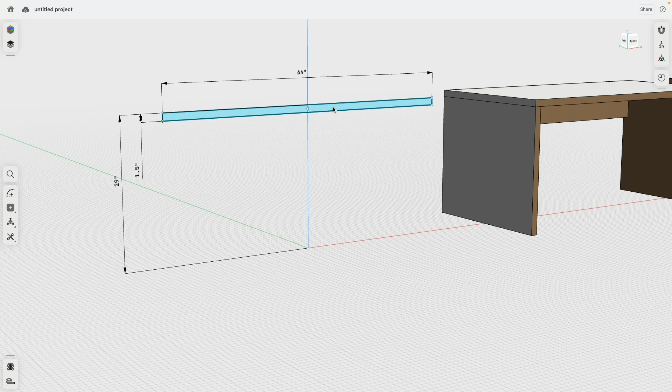Hello everybody and welcome to this furniture design tutorial, in which I'm going to show you how easy it is in Shapr3D to take a pretty boring rectangular sketch and create an interesting exploration of how an office table could look like. We cover different topics: alignment, putting sheets together, creating interesting looking metal legs, and then we'll go into more complicated tubular legs. We finish with a more refined mid-century like wooden table. At the end, we're going to put everything into the Visualization to add materials and explore how this whole series could look like. I'd say that's pretty fun.

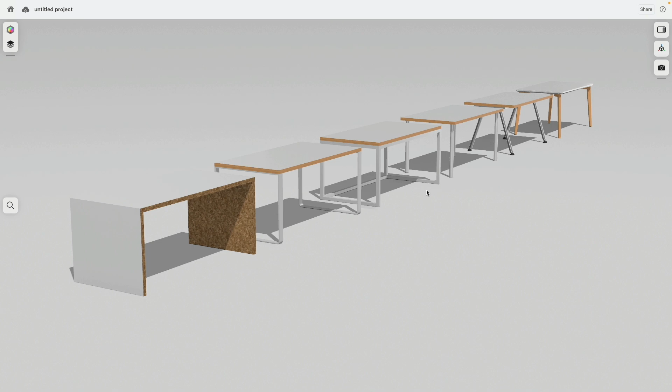Okay, let's do it. Before we get started, let's make sure snapping is on. We are in inches. Let's go to the front view. I move this one down, go to sketch, and I will start with the rectangle center on the z-axis, that's where I will start. I will click and then drag a rectangle out: 1.5 inches for the board thickness, tab, 64 inches for the board width, and enter.

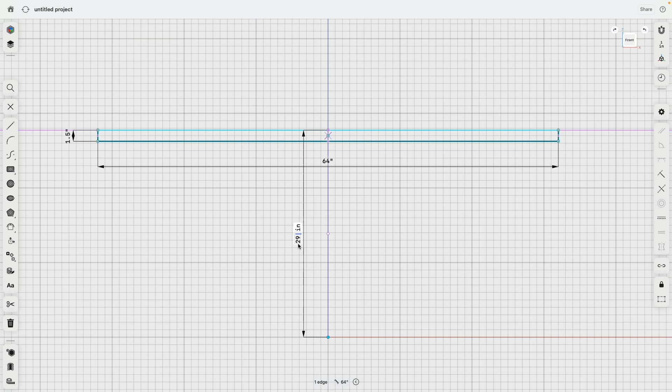Press escape. We can select the top edge, that's basically where the surface of our work surface would be, and select the sketch origin point. This dimension here we would like to be, let's say around 29 inches, 28 inches, based on if this is for an adult or for a kid, teenager or something. Press enter. Now we do have the position of the height and our tabletop.

So we can now select one sketch, drag this one out, and this will be - so 32 should be the combined - so let's say 16 inches. And then we go to history, extrusion, and say symmetric. So now this should be 32, and it is perfect. So there we have our generic tabletop.

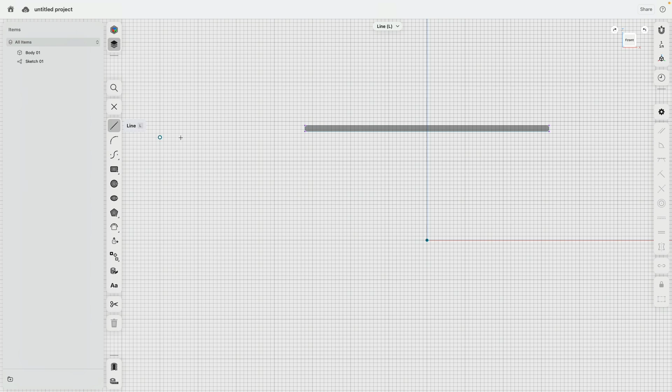Let's take a look at one of the easiest ways how we can build now under this a nice kind of construction also out of wood materials. Because the first sketch I created, I would like to keep alone. I'm actually now creating a new sketch, and there I can see where this new sketch intersects also with my 3D object.

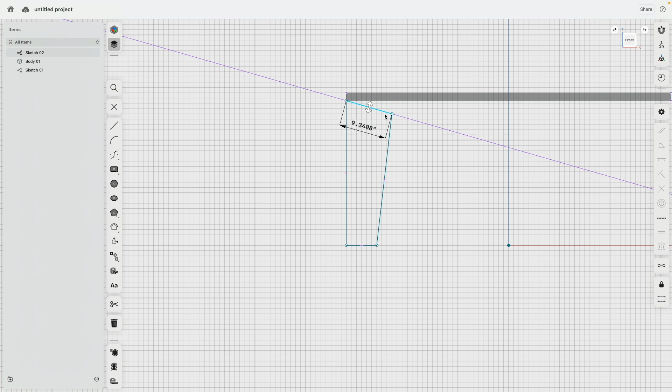Perfect. So there I click, go down. There's the axis. Click, go over, go back up and click. I did this on purpose a little bit crooked just to show you how you don't have to be perfect. This can't go down, this can't, or this can go to the side. So let's make this horizontally constrained. This is locked onto the z-axis. Perfect. So this one is going to be 1.5.

Then we should do the same on the opposite side. There we are. Escape, double click, horizontal, vertical, everything. And I simply make these two lines equal, so this is automatically constrained by this thickness.

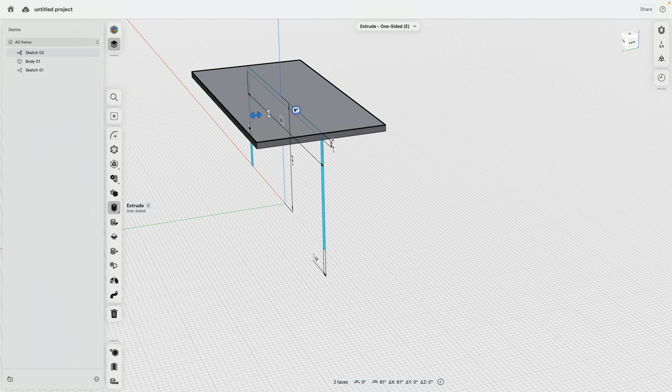Beautiful, cool. Then I can select the sketch profiles, extrude them out to the back of this top board, so I don't even need to specify the dimensions or the distance, and say symmetric. So the problem is that this might easily fall apart if we get a lot of force on the left side, so we need a crossboard.

Okay, so we go back to sketch 2. And now here I will draw in another line on top, escape, and a line here below, and escape, escape, select this one, horizontal, vertical, and then I can say let's say 8 inches. Very good.

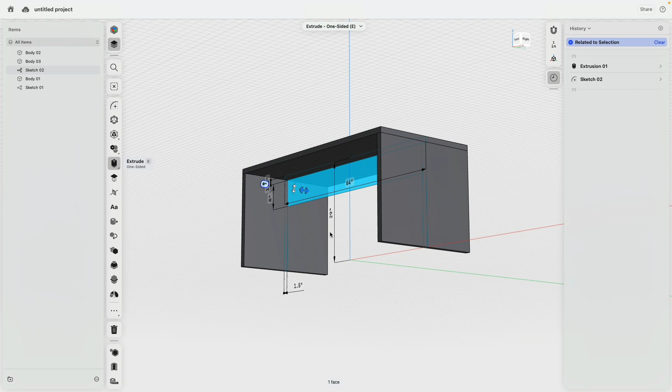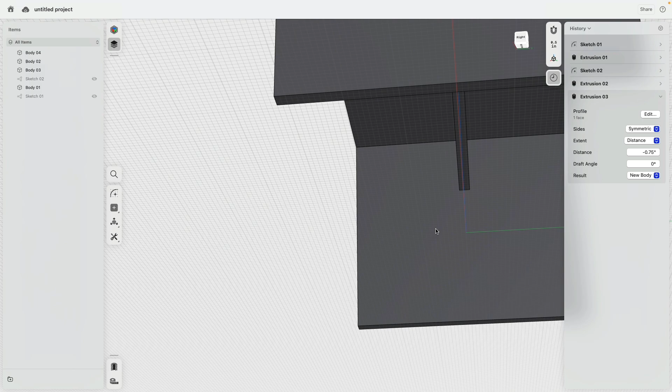So this one, there are actually two methods now how we can do this. We can extrude this 1.5 inches divided by 2, now that's 0.75. Okay, we can hide this sketch and this sketch, and then we go to here and say symmetric. Perfect, so this is now perfectly sitting inside.

And in case I would like this to be more on the back, so when I sit under this table my legs don't punch against it, I could select this one and then simply use the align command and say this one to there. Thank you, perfect, cool, okay. Oh, easy peasy.

And there is actually our first table we have. Okay, so we can select all these elements and put them into a folder. There we are, thank you. And let's move this to the side.

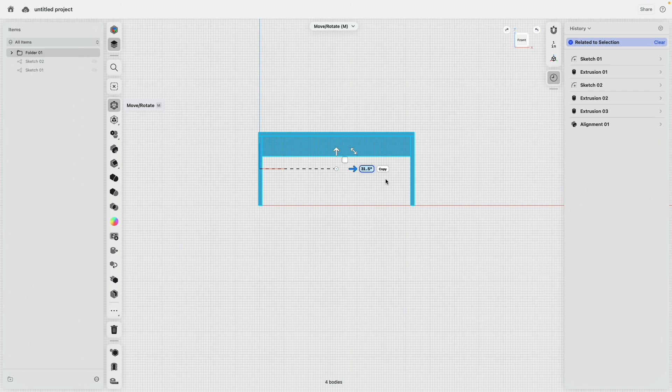Let's say 80 inches. Very good. Thank you. And hide it. I go back to the first sketch, and now I'm going to build this one more time. 16 inches, and we just do the same.

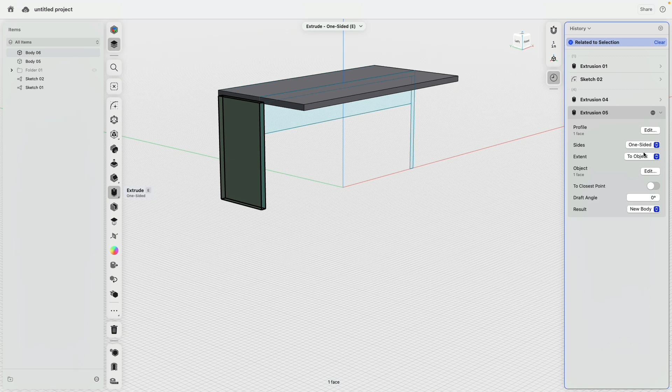Beautiful. Now, in this attempt, I would like to create more of a wireframe. Check this one out. We have this sketch here now. So I can select this and we do something in a similar way. Bring this one over. And then symmetry. I can hide the sketches.

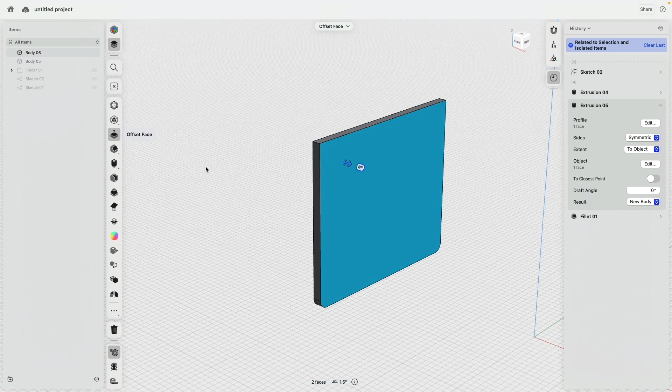I will select this and round this a little bit, maybe by 1.5 inches if I want to. Select this one and isolate. I will select the front and back face, and then let's give this a thickness of, let's say, 0.25 of an inch. Undo, isolate, and then we make a mirror.

There we are. Cool. So this is maybe kind of like how we can build a leg that is made out of sheet metal that is bended and then welded together. And then here, there might be some screws to put this together.

Very good. Because this is parametric, we can adjust the dimensions. Maybe quarter-inch is not as strong. This should be a nice and strong piece, half an inch. This actually looks like it has a good weight.

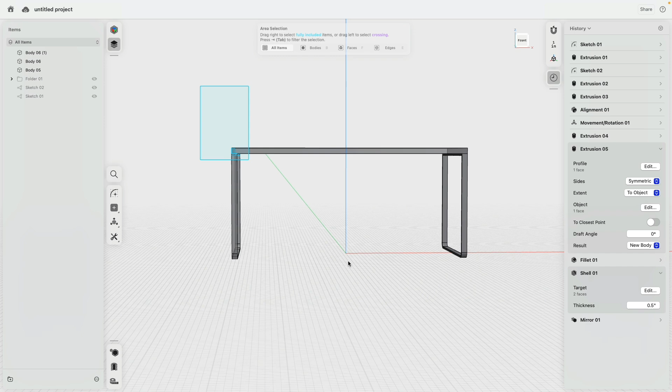Beautiful. Select everything into a folder. There we are.

And I think the first one we did 80, so the next one we do 160. One back. There. Cool. Now there you see we have always these nice distances.

Okay, next version there. Oh, we do the same thing. 16 repetitions make you become very fast at something.

And now I would like to figure out how can I create a nice, linear construction of square tubes that goes down here and here, and the corners at the bottom are connected, and the back, and it's nice and stable. Essentially all we need is a square sketch, which we extrude down. That's kind of like the tubing, and then we just glue all that stuff together.

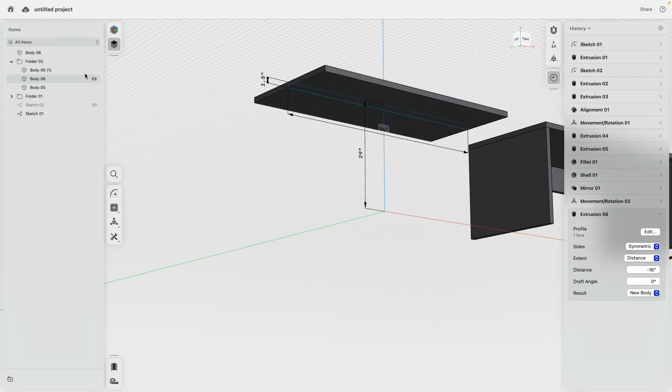Okay, very good. So I can select this lower surface, go to sketch, there we are. And then I simply do a diagonal rectangle from this corner, draw something, let's say 2 inches by 2 inches. Very good. And then this sketch profile.

I would like to extrude down to here. It should be 27.5 inches, but as a new body. Thank you. Very good. Okay. That's actually quite big.

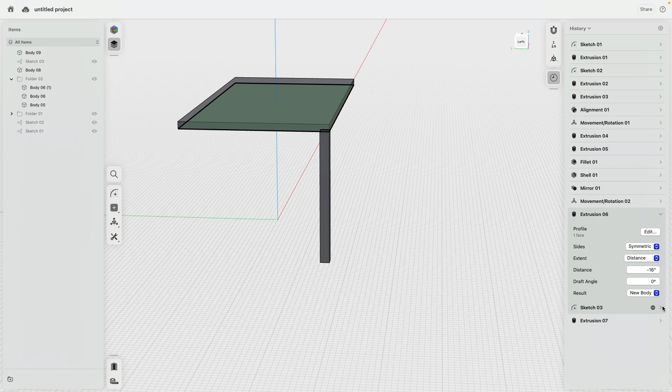2 inches might have been a little bit optimistic. What about we go 1.5? Where's the sketch? There it is. There. Doesn't allow me to adjust the sketch. Oh, how does this happen?

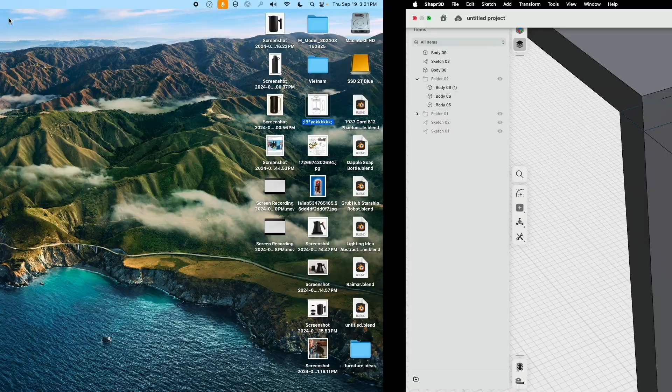Okay, let me pause for one second. And here I'm back. All I needed to do was restart the application and that fixed it. Not sure what that is. So in case this happens in your case, just restart the app. Then, all is good.

Beautiful. Okay, very good. So this one, I would like to make a copy and go over, but this edge I would like to align to this edge. Now we use the align command.

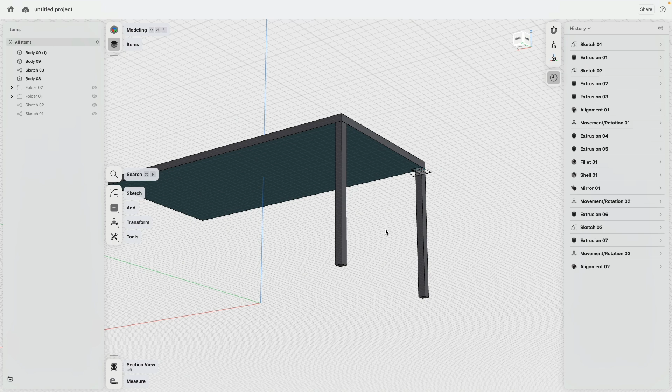Thank you. Very good. Then this one, I make a copy and rotate down 90 degrees. And I make one down because this edge goes to this edge and align. Thank you. And then this edge I will align to that edge.

Thank you. And then I will select this face and this face and this face and say replace. That should be the target. These are the pieces to move. Click done. There we are.

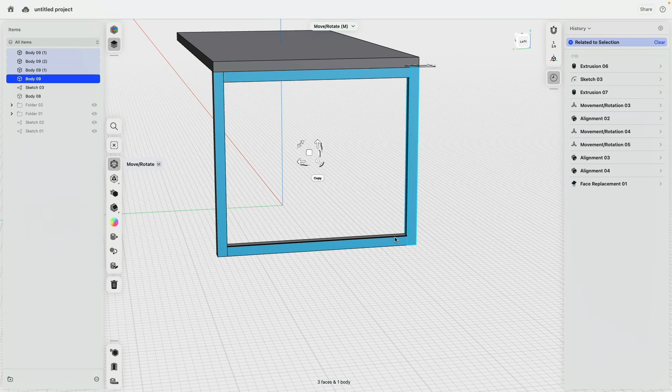Beautiful. Cool. So number 1, number 2, number 3, number 4, double click correctly, so everything is really selected. And then we do a quick mirror command to the other side.

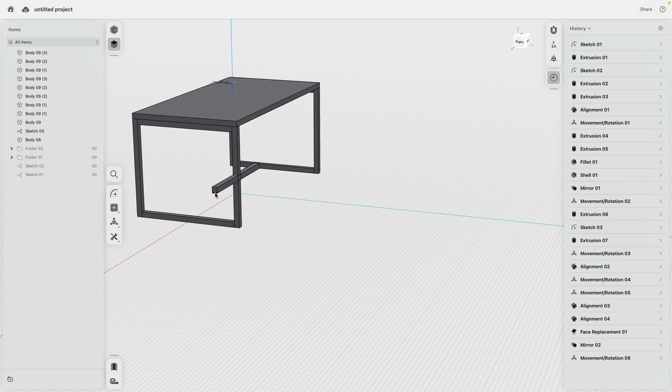Thank you. How do we do the rest? Well, we can use this one. We make a copy, bring this over like this. There we are. And then this one goes to here and align. This will replace face to there.

And then we make a copy of this one to go up and say this edge here lines up to that edge and align. Done. Perfect. Cool. If we want to, we could also put something in front.

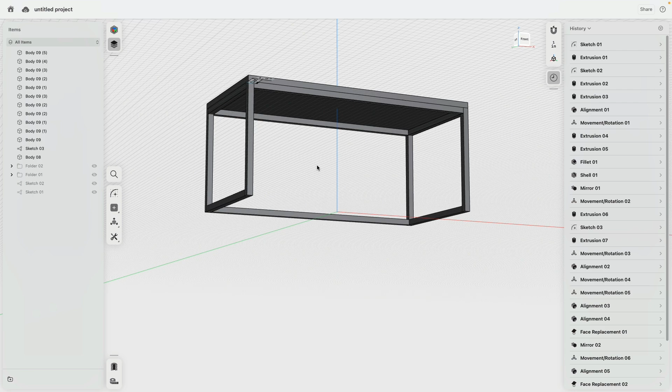That's maybe one option to do. Why should we or could we do this? Well, it simply makes sure that this wooden board over time might not sink down at the center. But only because this is square tubing doesn't mean that metal also has some deformations. This is something where, definitely when we work with the production engineer, they can give us more input.

But as you see, that is actually how easy it is to create a design of a piece of furniture where we have kind of like a linear support structure underneath it.

With all that said, this one I bring down, I select all this into a folder, and then we bring this over. Was it 80 multiplied by 3? That should actually work. Whoop, where is it? Where did it go to? There we are, let's see. Yep, there it is, beautiful.

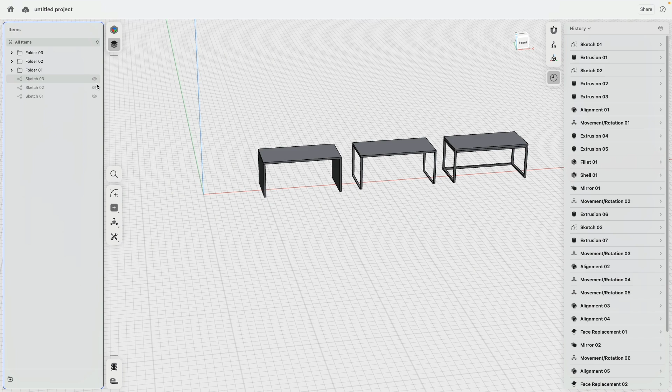Cool, okay, we don't need this one. We don't need this one. Let's go to here, let's actually look into a table with tubular legs.

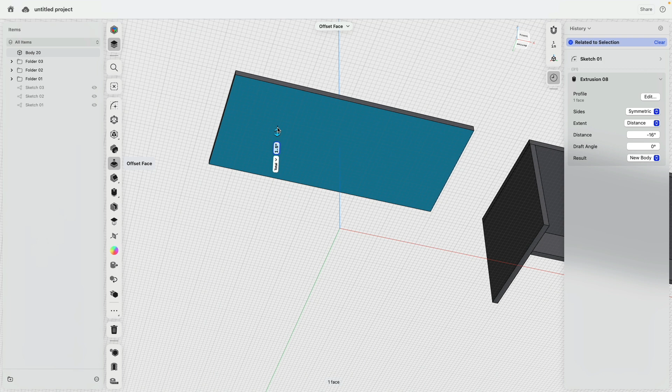So one more time, 16 inches. There we are, then we do the same. Okay, and I will go on to the sketch below because now I would like to create a sketch on there. There's a circle tool. There we are, well the 2 inches is kind of okay.

There we are, and I will do a line to the center of this circle. Escape, escape, then I select the line and I will select an edge of the body. Look, I can specify this should be 45 degrees. This line is just a construction helper, and it helps me figure out how far this leg or tube is away from the left and the right side.

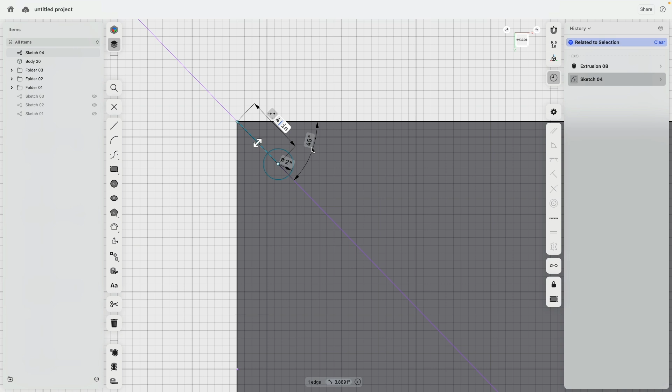So if I give this a dimension, let's say 4 - this is actually kind of like 2 inches, so it's like 3, for example. Anyway, with this done, now we can go ahead and extrude this one down. Again, because we work with the grid and snapping and clean values, it's very easy to know when this really hits the ground. There it is.

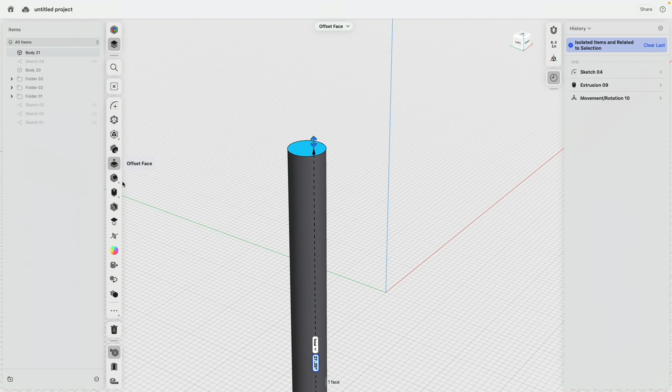We could have some sort of system actually in there to screw everything in, but let's make this a tick nicer. So this face, I move down by let's say 1/4 inch. Then that face, I move up by 1/4 inch, but as a new body. And then I simply flange this one out to make this a tick bigger. Select all, union, thank you, unisolate. No - so this, for example, looks a little bit more stable.

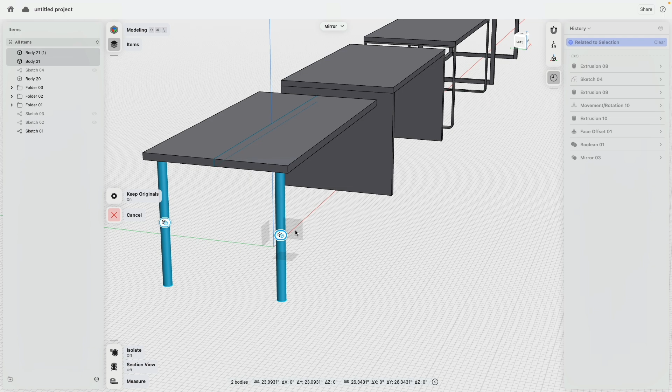Because we started the first sketch, this one, at the Z centered, and also from here centered, I can now use the mirror command to simply mirror everything over. And then now exactly that, they perfectly match. Here, actually, let's put all this together.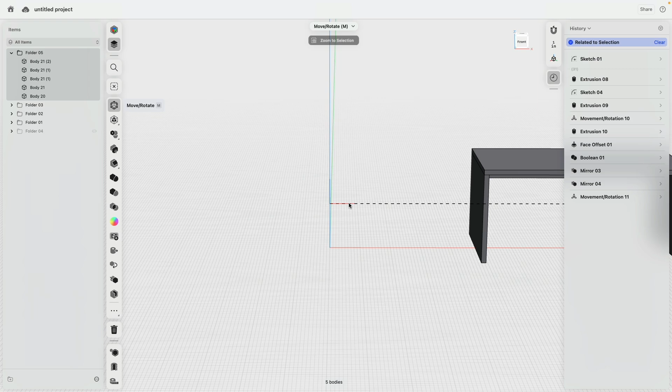And we have the next chair ready. Sorry, table. No? Let's put this into a folder. And then 80 multiplied by 4. There we are, cool, okay, look at that. 1 version, 2, 3, 4.

And let's do one last actually. Okay, so show this one more time. We'll bring this over 16 inches. Very good, hide this one. Then actually this should be 32, but I'm simply going to here to do this.

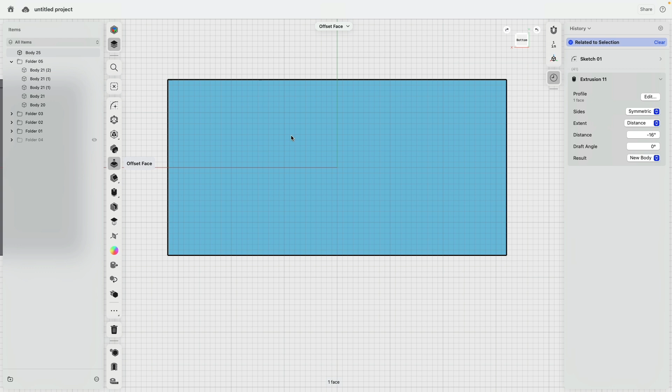And now I would like to actually have something that is below as a foundation, and then I would like to connect some legs which are angled. Okay, so what I will do is I go under this plate, create a sketch. I will select the from center and just draw something like this. We can make this actually even flush if we want to. I go in a little bit there.

So this rectangle, now I need to think about the square tubing, how thick the diameter is. So 1.5 or 1.25, that is actually the diameter. Let's say 1 inch, new body. Then we select this, isolate, select top and bottom. And like we did with the other object, we are going to shell everything. 1.25, because I think this was - oh, that's just 1 inch.

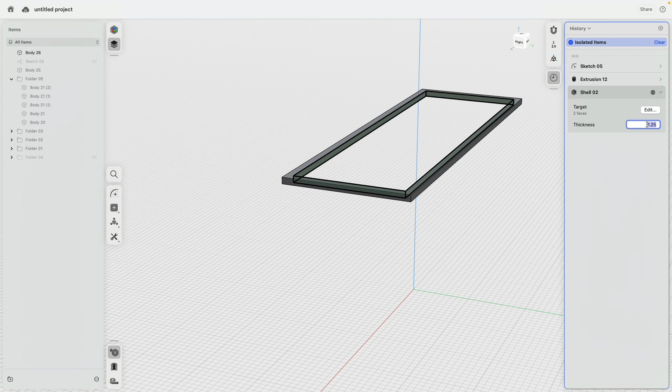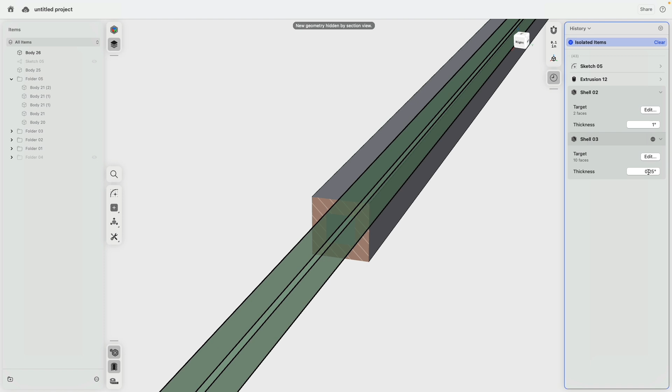Okay good, well thanks to the history, let's fix this. By the way, if I go to a side view, section cut, you see this is solid. We use the shell to cut out the center. Oh look at this - we select everything, go shell, and then we say 0.25. No, actually, we have actual square tubing. That's actually how fun it is to chain the modeling commands and then get really like realistic designs.

Okay, there we are, so we have this now that is actually perfect. And now I need to have some sort of something where the legs go to. But maybe first I will think of where am I going to put the legs to. I have really no idea where they will be.

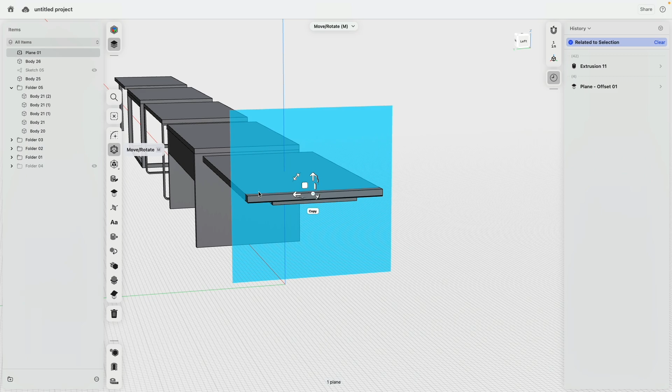So I will select this construction plane and then go to add plane and move this simply a little bit. It doesn't really matter what value you have - that's kind of like the center of where our legs will be. Then on this, we're going to create a sketch.

Beautiful, okay, let's draw a line straight down like this. Perfect, we have here actually these intersection points. Thank you, then this one we connect. I would like to have a parallel line here. So these two lines need to be parallel.

What is actually the diameter? That's actually the radius, so 1 inch. When we revolve this, this will be 2 inches. Very good.

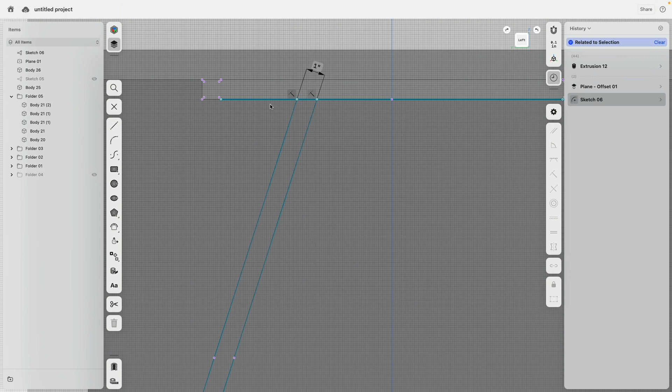Here we will have a nice socket. I'm going to create here also a circle like this. Okay, actually, wait, let's do this one more time. We can prototype this, so that's the center, goes to there. Yeah, that will be fine. And here I'm going to draw a line straight down.

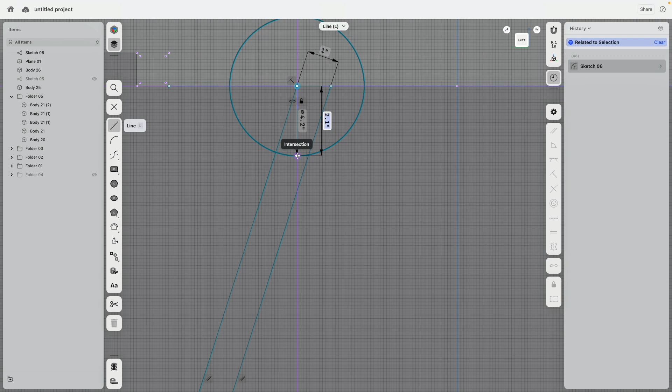Now we need to think about how we are finishing the bottom. I will go ahead and say, well, this point goes up. Between here, I'm going to draw a line. Now this should be a tube, so that has to be perpendicular. Whoa, oh, it's just rotated. Okay, now I can look at that. Now rotate this one.

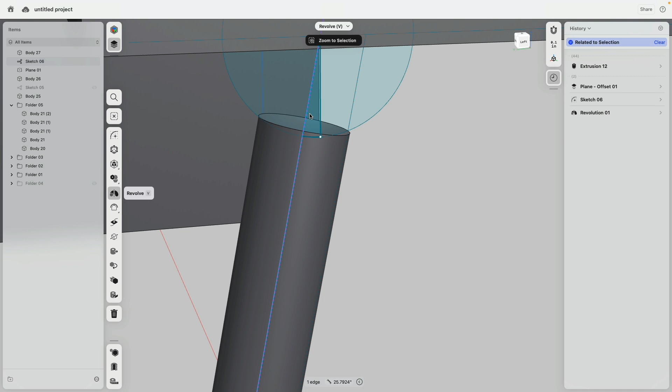So before we continue with the sketching, let's exit the sketch for a moment. Then I select all these. Actually, no, I just select this one and do a revolve. There's my leg. Then I need to select kind of like a quarter of this circle and do a revolve.

There is the socket. Okay, now we can see that, for example, this construction plane has to come further inwards, -4. Or, yeah, whatever, that's kind of like the nice prototyping.

Okay, very good. Now let's go back to the sketch. We can rotate this nicely around. This is actually quite cool.

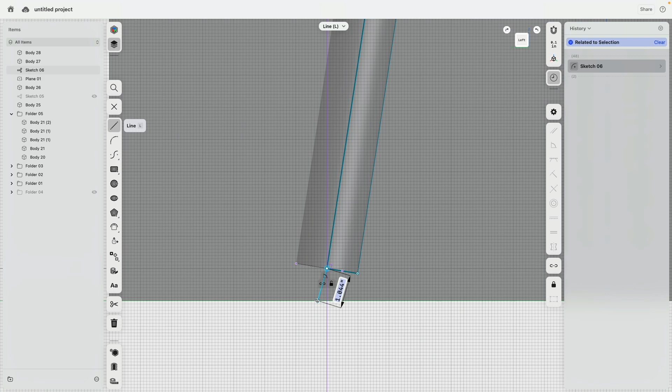And now down here, I would like to have some sort of a socket also. So I draw a line down, and then this line, we have a center point. That's here kind of like the origin, and escape. This line will be horizontal. Wait, you should stay there, be locked. And then this one and this one, these will be parallel. Whoa, no. Whoa, what's going on here?

Okay, so first this one, let's say make it 4. Now we can move this around. What is going on with that one? You stay vertical, thank you. This is how we stabilize a sketch, so when we adjust it, everything adjusts the way how we predict.

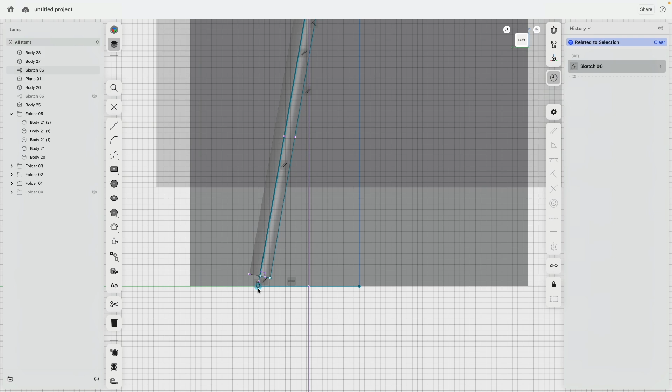This lower point here, this one, we can move over a little bit more. Very good, so here's the edge of the table. If this is too far in, the table is not very stable. Easy peasy to figure that stuff out.

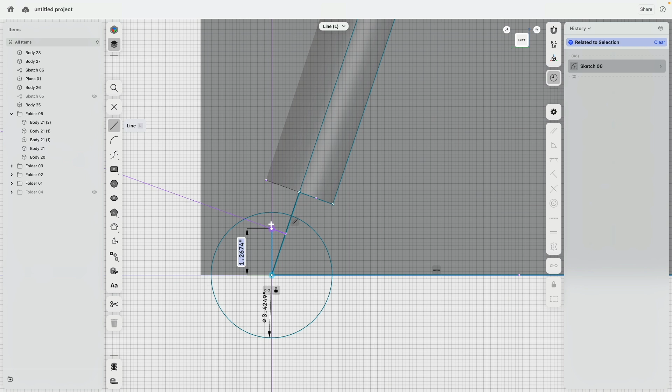Okay, now we do kind of like a nice fun socket here again. There we are, and a line up. This line needs to be vertical because now we have actually, as you can see here, another piece. That's actually how it could sit onto it. And now the last thing to figure out is how do we do this transition there?

We can sketch it, or we can also simply use 3D modeling. We bring this one in as a new body, and then this we shrink. There. Very good.

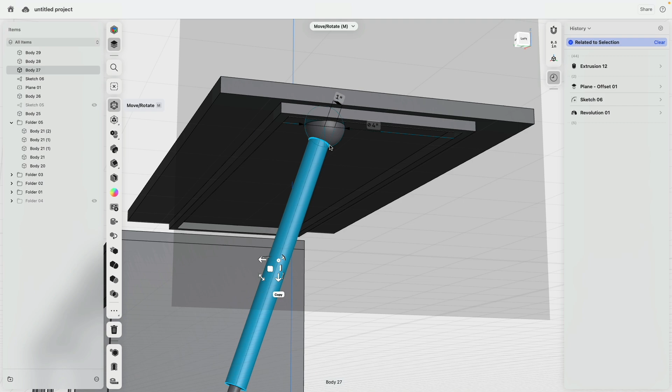Okay, now this and this, for example, we join. Let's say that's actually the part of the foot. This is actually the leg. There, this is one piece.

Okay, very good, now you see that's actually super easy, and also how step by step you can go ahead and build everything. This construction plane can get even smaller. Very good, so the only thing maybe that I want to change is where this construction plane is, and then how do we make sure this doesn't float in space?

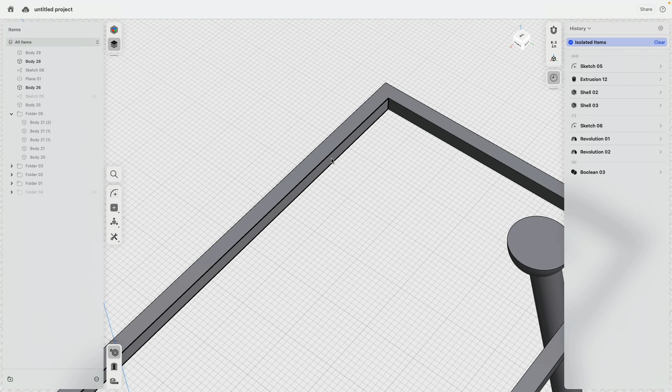So we need to have some sort of connection there. How do we do this? That's actually easy, work with the geometry you have. You can sketch everything, or we just simply use direct modeling to do everything.

Look at this, I selected these faces I have. Oh wait, I can do this even easier. From here, extrude, zip, bring this over, I don't know, 6 inches as a new body. Yep, that is actually even equal.

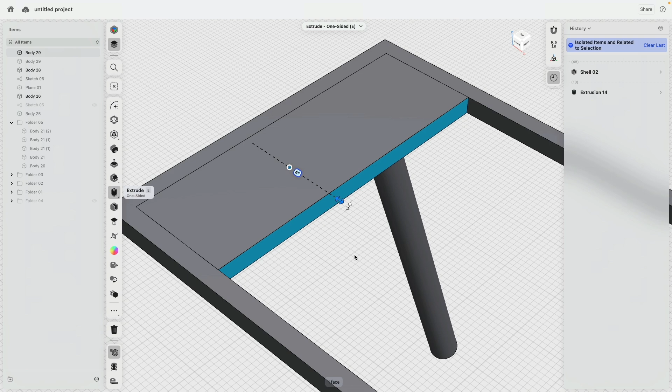And then unisolate, isolate. And honestly, here I want this to be not a big block of steel. We're going to make this a sheet metal. There.

Now that is being screwed together, then this can be screwed onto it, and that is actually the way how that stuff works. Okay, now all we need to do is select all this and do a mirror command.

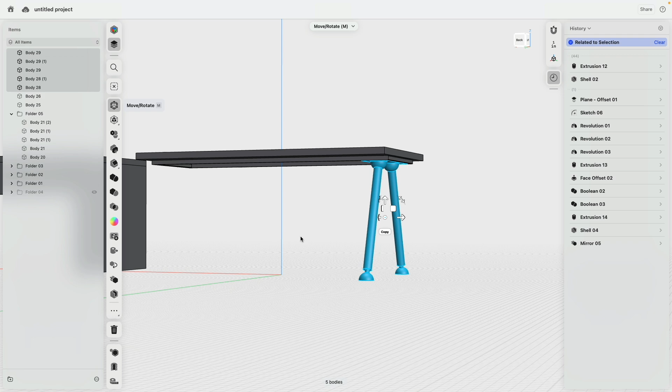All these sketches I put into that folder, so they're gone. And wow, these feet are kind of ugly. Nah, it's okay, everything here is really meant more to show you also that process. This is true speed modeling.

But I cannot let these feet be the way how they are. There's actually a nice exercise to show you how we can fix stuff then. Well, maybe we make this simply smaller.

Then here we have this element that is extruded out. So maybe 3 inches. Okay, that is actually way too big. So diameter 0.75. There, yeah, that made it actually smaller.

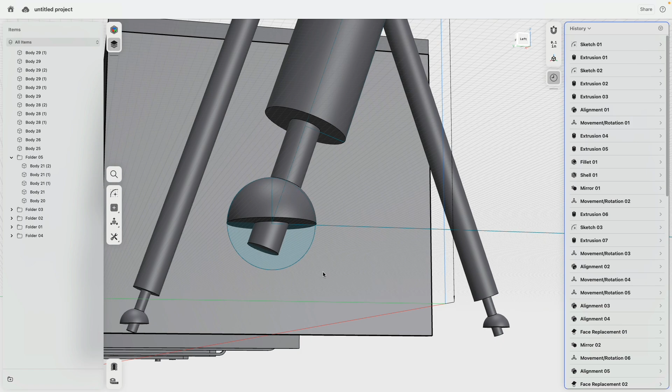And now actually the feet look a little bit too silly. So one last refinement, we're going to bring this edge further down. There we are, you see how this extrusion also then changes.

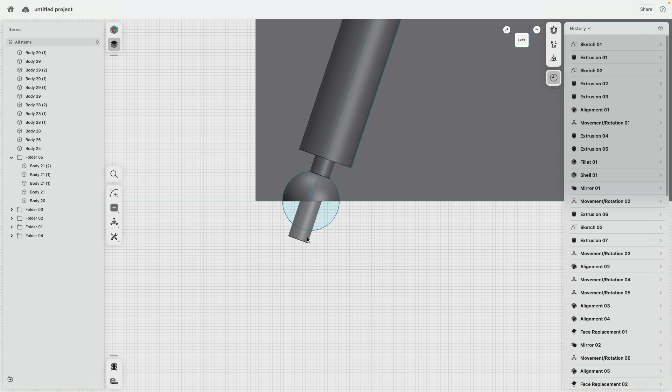Very good. And then we can go back, select actually this surface. There we are, so we set this to be 1 inch for the diameter. Oh, this—oh no, wait. I would like to change this to be back, let's say like that. So 2.5 maybe in my case.

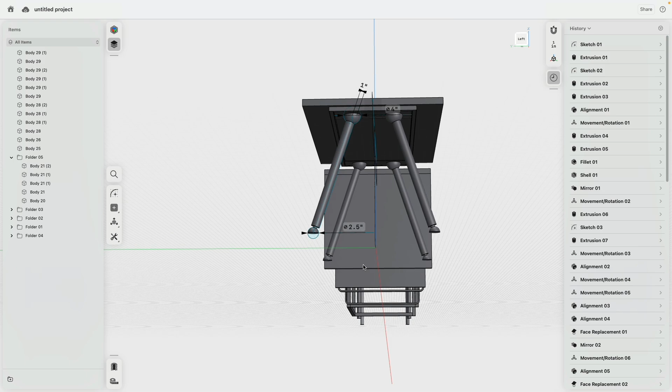And then the last thing to fix is how far do I extrude this one? 1.5, and close. 1.3. Where is it? Let's peek. Yeah, that is actually better.

Okay, beautiful. All this into one folder. There we are. Cool, yeah, look at that.

Now to do our correct alignment. So 1, 2, 3, 4, so 5. That means this thing we move over 80 inches multiplied by 5. So we have a nice history here, from basic block to that, to that, to that, to that. Yeah, look at that, pretty fun.

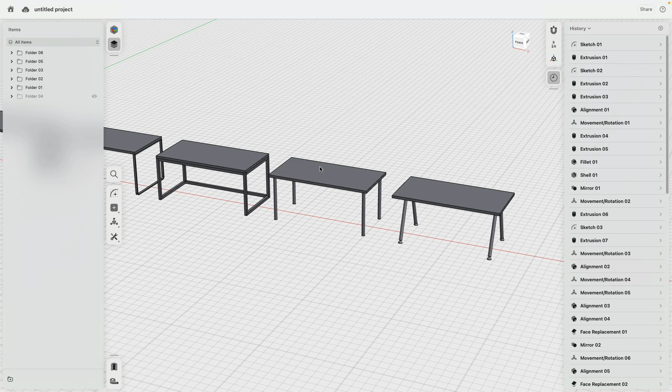Okay, cool, so here comes the bonus table. One last, okay, here 16 inches. This one actually will be nicely detailed. That's going to be our crown jewel. There we are.

And I'm going to select actually these very sharp and painful looking edges and round them a little bit. Yeah, let's say like this. Very good. Then I select this bottom edge and I do not round this, but I chamfer this. Let's say 1 inch. There, look at that.

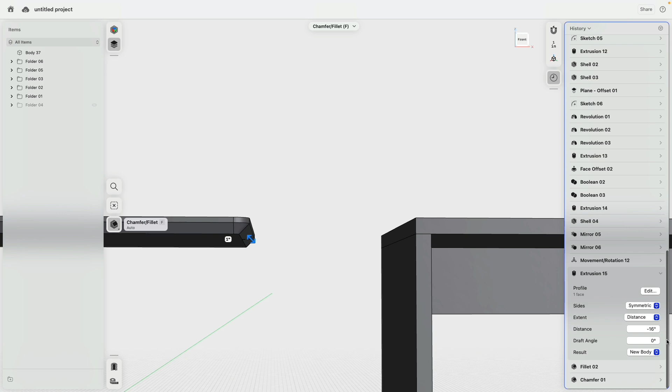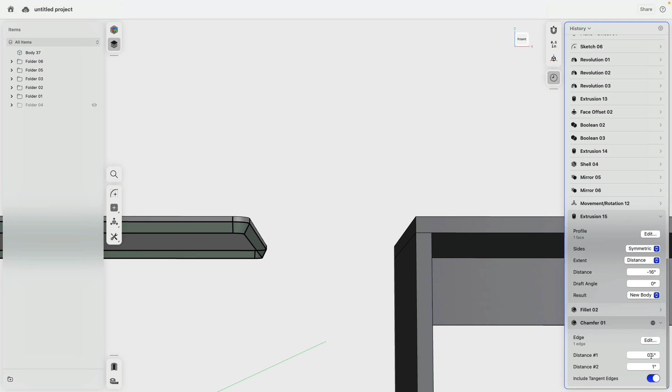Quite nice, no? When we go to the chamfer, we have actually two distances. If I say 0.25, there you see the top one is actually 0.25, so that goes up, and here 0.5. You can see how I can change actually the angle. If I go to 2, that's not going to work, because at one point this circle here will be collapsed.

So maybe I set this one to 0.75, go to a side view. So there you can see this is not 45-degree anymore, this is more at an angle. And then I can select here, here, and here, and say 0.1, and just round these edges.

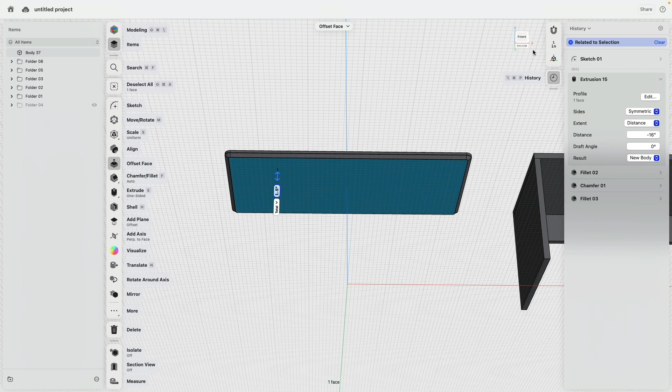Beautiful, so now that's kind of like how you can create a tabletop that has rounded edges, and the bottom is filleted. Okay, then we go to the bottom, create a sketch there.

We do have actually, because it's a rounded part, we don't have edges anymore. But look at this, here and there we have actually these snap points. And then we can make this horizontal, vertical. And then actually here, with this, we can specify 90 plus 45. So 90 plus 45, that's 135. But just for the mathematically lazy people.

Hey, we're designers, artists, we didn't go to math. There, and we make this a regular thing, so I have a nice 45-degree angle of this line. Why did I create this line?

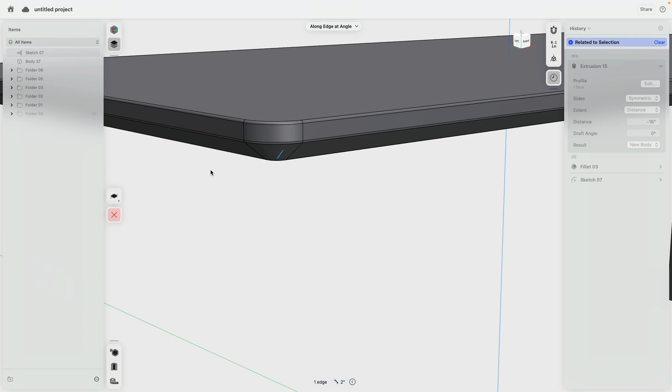Because now I can go to construction plane and say along edge at an angle. Select this one and say hello there. Maybe this one—no, you don't like this one. What about this? What about this one? Oh, that one is okay. This is actually the second click as a reference, so this line to this one is a reference.

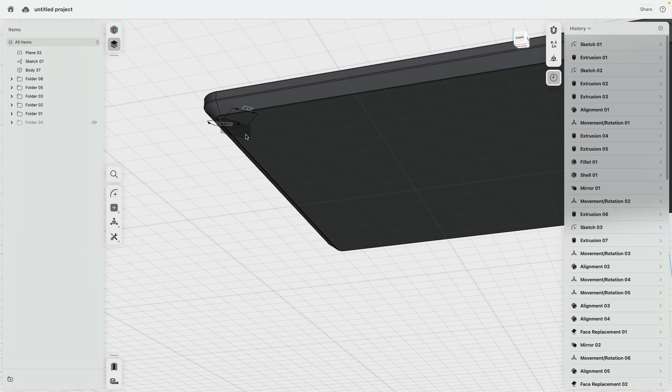We rotate this one down 90 degrees. So you see now I have a construction plane that is 90 degrees there, and that we can create a new sketch.

Okay, so we make a beautiful wood leg. Click, click, click, click, go up, go back, go down, and escape. This one, and this one, and this one will be horizontally, vertically constrained. This can be 2 inches, that is fine.

We see actually here are some intersections. I do not want, for example, to intersect with that sketch, but from here it intersects with this arc. I can draw a line, and this line I make construction and horizontal.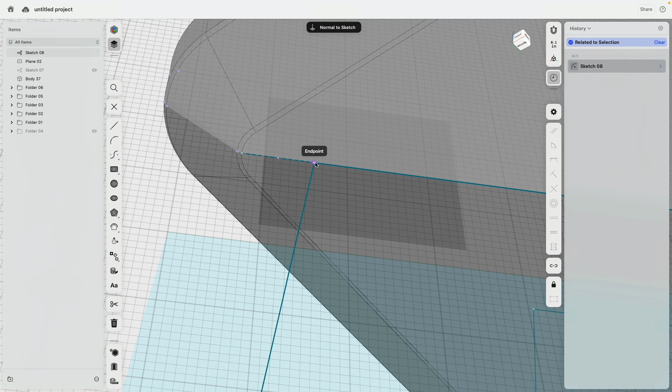And that's actually how I'm going to glue this sketch right under that table surface. This is now parallel to that. And then with this line, I can specify what's the distance. Cool, okay.

1.5, maybe, I don't know. This is something we can play with later. Okay, the rest looks kind of fun. Okay, then let's take a look at 0.75. Okay, go symmetry. There we are. That looks kind of cool.

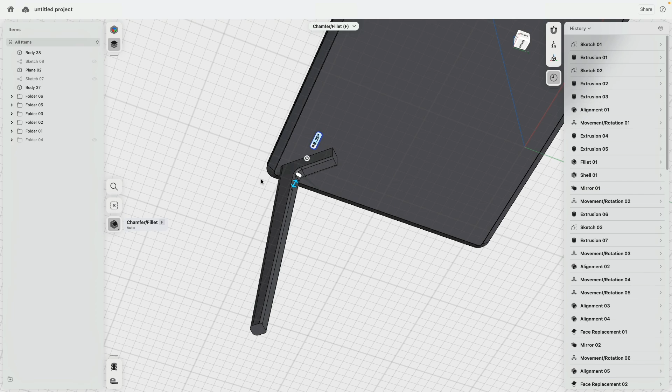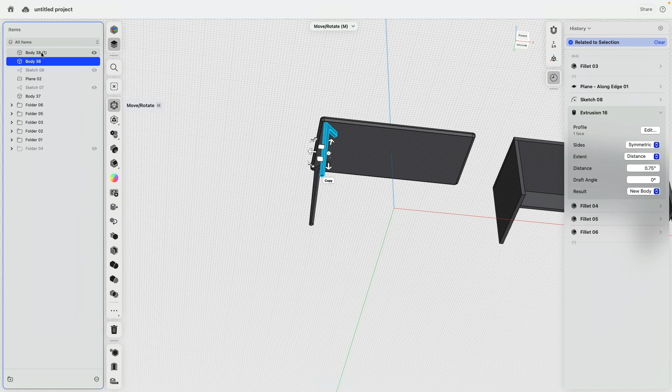Okay, these front edges I would like to round nicely. Then this one we round, and then we round this loop. The top ones we leave sharp. There has to be some sort of a mechanical element to connect this one under it. We skip this one. We kind of build this actually in here in a similar way. So, same tool, mirror everything and mirror there. Beautiful. Oh, look at that.

How long did this take to build actually? 2 minutes? Really fast. Okay.

With all the stuff done, now let's go ahead to the visu. This is our default material. If we want things to look nice and glossy, here let's override this. It's going to be a nice and white table system. And then now, because everything is adjusted, now we can go ahead and start working on these individual tables.

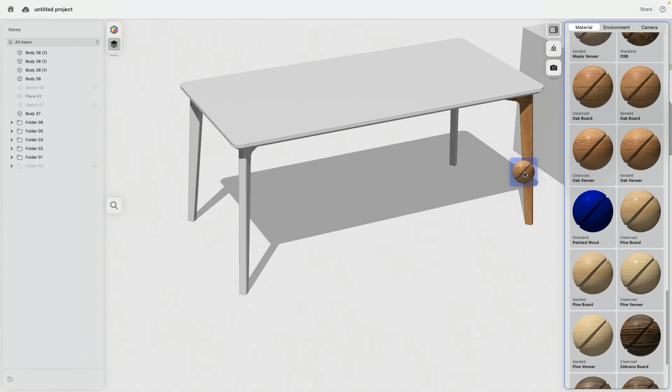Let's say here, what type of wood do we want to use? Oak veneer or pine. That's up to you. We can also work with maple. Oh, maple maybe it's not bad. There we are. Not far for that.

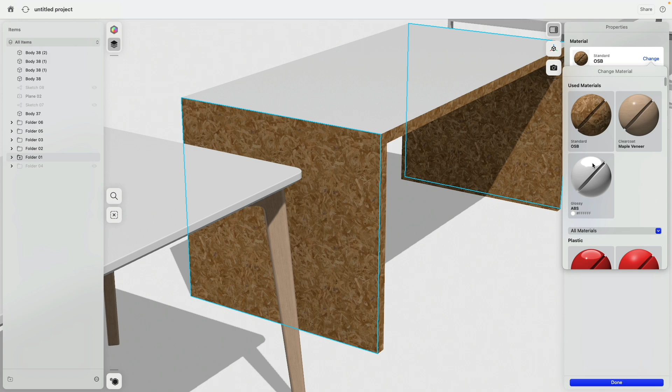This could actually be a fun table to explore, being made out of the OSB material, and then the top surface that actually we seal with something different. We could even actually maybe play with this idea of, okay, what about the sides are actually treated too, so we put like a veneer over it. Oh, look at that. That's a nice fun material mix. Oh, hello there. You're good. Perfect.

What do we do here? Maybe with this one, we say, look, what about actually here? We do like a layered material on the sides. What about, where's the bamboo one? It was here somewhere. Don't hide, I will find you. Of course, it's at the end. There.

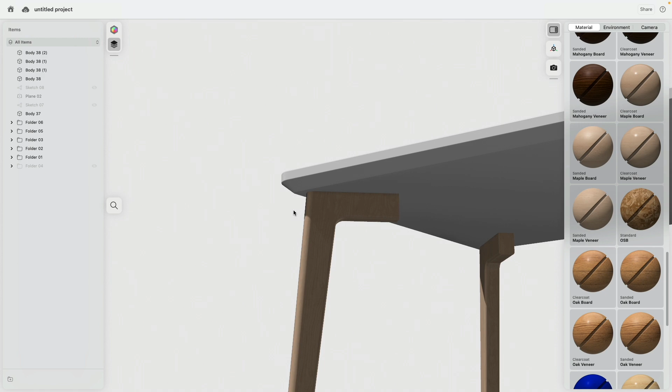Cool. Okay. Because I do not have any fillets here, it's a very drastic material change. If we would have fillets, it would look actually much nicer now. Now you see here. Oh, this is actually pretty good. Cool. Okay.

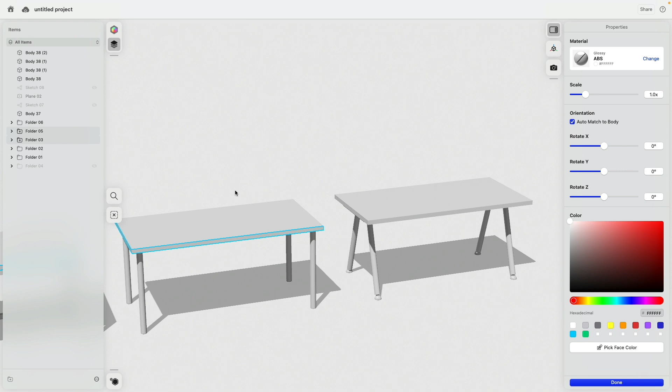Yeah, beautiful. So maybe let's finish actually the other pieces here too. How do we do those? I really do like actually this mix here. So I will go ahead and with all those, simply select the sides, zack, zack, and zack, zack, and here too, and then change, and we use the bamboo, so it's exactly the same.

Now we can do the metal. Let's go to metal. Very often that is powder coated. So if we scroll down, where is the powder coated material? There it is. And we can simply drag this one onto there. Here too, by the way.

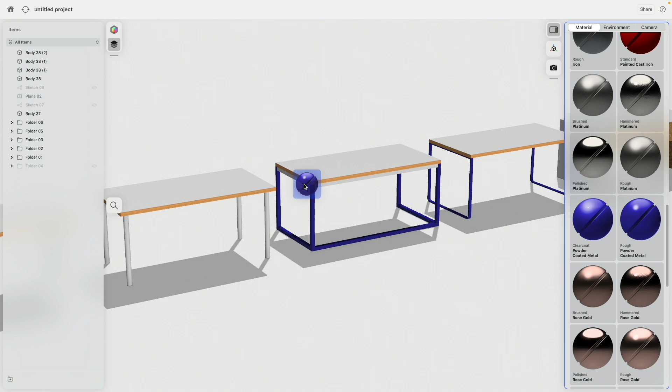These legs have to be adjusted. They're way too flimsy. But that's not going to be much work since we can very easily fix this. Thanks to the history.

Come on, double click to select everything. And then of course, now there's a crazy color here. Let's make this maybe white there. We could also here select this one and this one and this one. This is also all powder coat white.

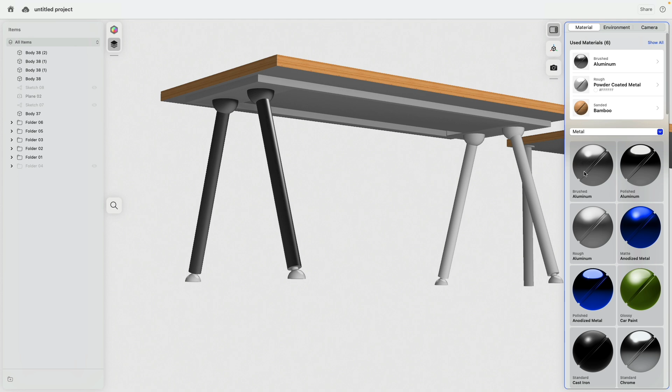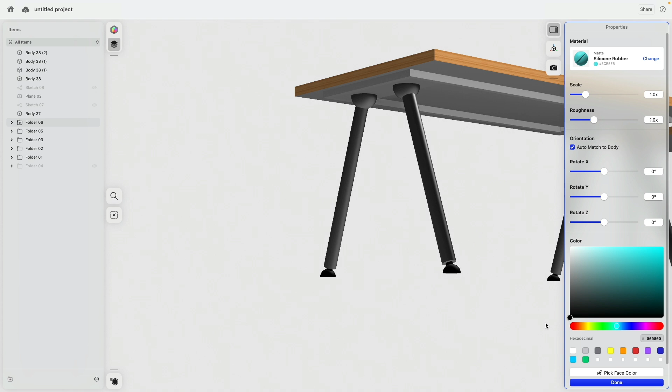If we want, oh, actually, let's go with brushed aluminum for those legs, for example. And then the feet, there we go, plastic. And we, yeah, let's say we have some sort of a soft silicone material there, or it could also be a harder plastic. And then we just change the color. Don't work with black. There's no black in the real world.

Okay, beautiful. Now, and then we just go to environment, change maybe the environment. Actually, that also changes the reflections. Now everything here looks much better from there to there. Look at this. This really can have a huge, significant impact. And look at this beautiful furniture exploration we did.

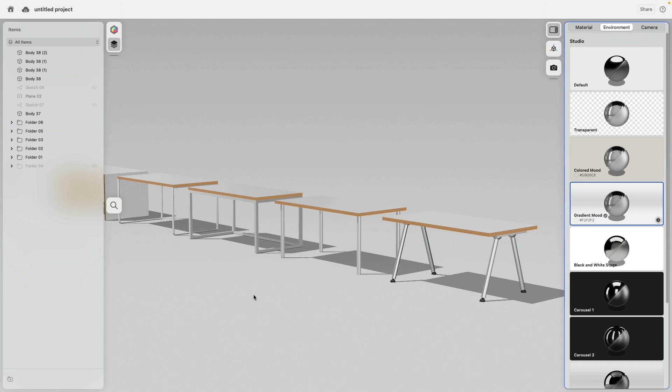And I mentioned this one needs to be adjusted. Okay, let's do this. Click this one. There's the history. The extrusion, we need to figure out what is doing what. Oh, that stuff is being built there. Sure, it makes sense because later we move this over here, there, where we are extruding this one.

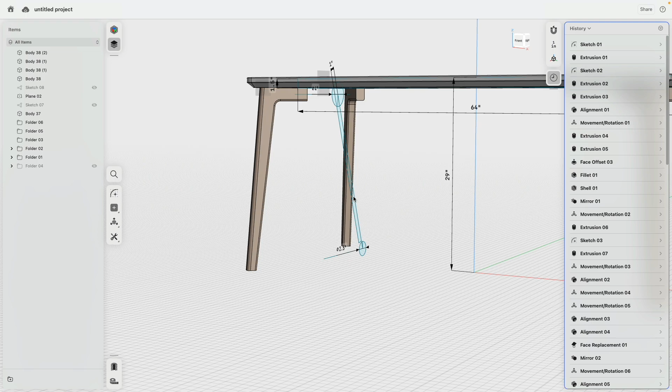Okay, so how do we do this? Fillet, fillet, fillet. After here, I will insert a breakpoint there. And now this, I say 2.5. And then I can quit this breakpoint and everything is updated. Cool. I'm glad actually I showed you this, how to fix that.

Yeah, perfect. There is actually our 1, 2, 3, 4, 5, 6, 7 quick ideation versions of how to make an office table. Good job.